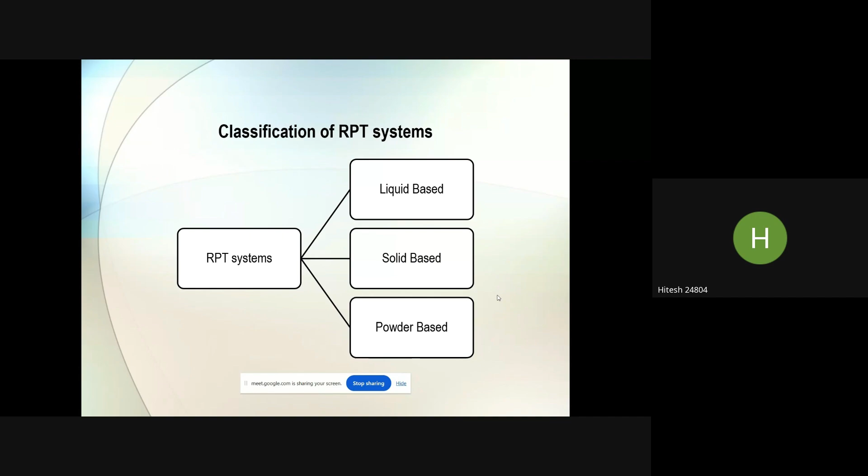Here are the RPT systems, rapid prototyping systems. There are three basics: liquid, solid, and powder based. In liquid based rapid prototyping, these are some manufacturers currently working with equipment related to liquid based rapid prototyping, and that equipment is nothing but a 3D printer. 3D Systems is dealing with stereolithography. Then Denken is one of the famous service providers in this area, and also Aaroflex. These are some manufacturers related to liquid-based rapid prototyping 3D printers.

Similarly, in solid-based rapid prototyping systems, the fundamental principles are laminated object manufacturing and fused deposition modeling. These are very common fundamental principles working behind 3D printing in case of solid-based systems. Again, some manufacturers dealing with this have been mentioned here.

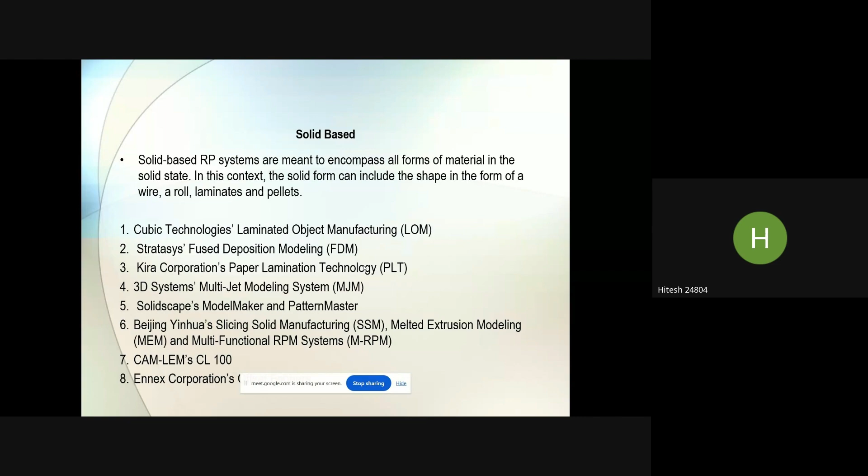Then moving to the powder based system, because selective laser sintering is very famous in this category. Z Corporation is there, providing three-dimensional printing. Z Corporation is one of the famous manufacturers.

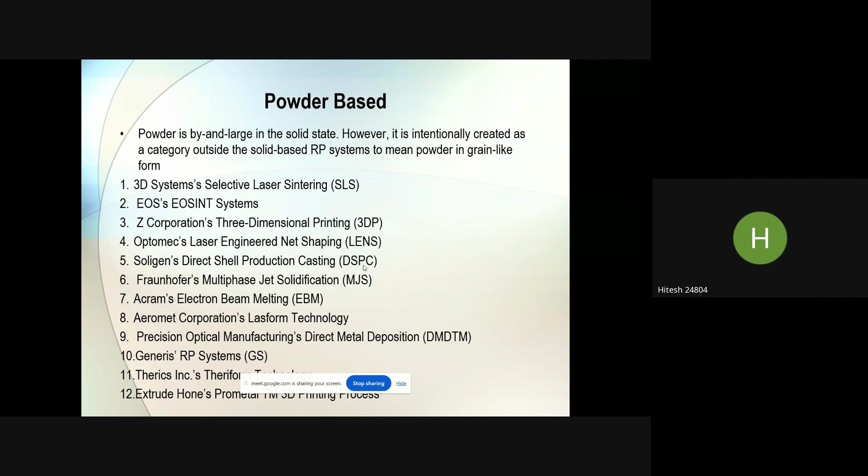Here we are adding material. In case of conventional machining processes, we have to remove the material - that comes under the category of subtractive manufacturing. Additive manufacturing, obviously, is where we are adding some material. The third one is the formative process, where we are changing the shape of the material by putting some stress into it, like bending stress is one example. So we are producing or manufacturing various composites, metals, and alloys by means of bending. Bending machine is an example. There are n number of components used in the automobile sector produced using bending machines. These are conventionally available materials where we are just changing the shape of the material.

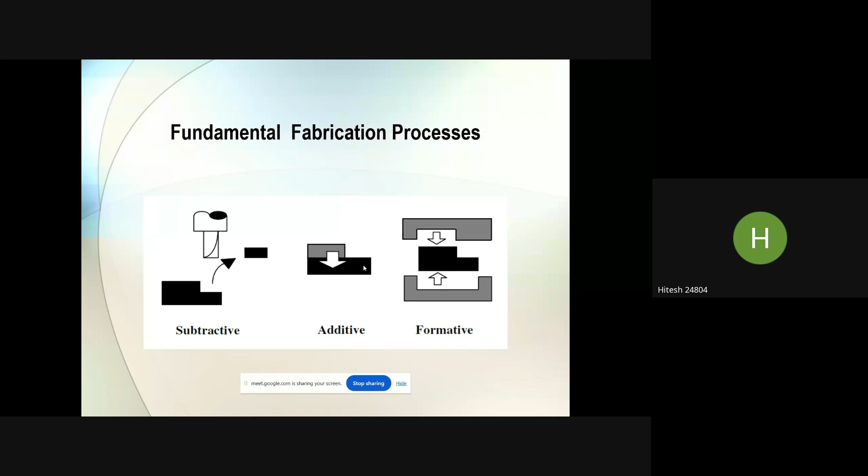Then there is a process chain in case of 3D modeling. These are the steps.

We have to 3D model a product which we want to manufacture using a 3D printer. Then data conversion is there. We have to check and prepare that, and once we are done with fabrication, we have to perform post processing. These fundamentals I already discussed in the first session, and in between there were many other sessions where these were discussed.

Now, data transmission via these two formats are most likely considered: STL and IGES. These are the two famous formats which are required in case of 3D printer.

So in the process chain, first of all, you have to prepare a 3D model using dedicated software. Then you have to transfer that data into the computer linked to the 3D printer. Then in the 3D printer, once printing is done, you have to perform post processing. That is the fifth and last step of the process chain when dealing with additive manufacturing or 3D printing. Then STL is the first process.

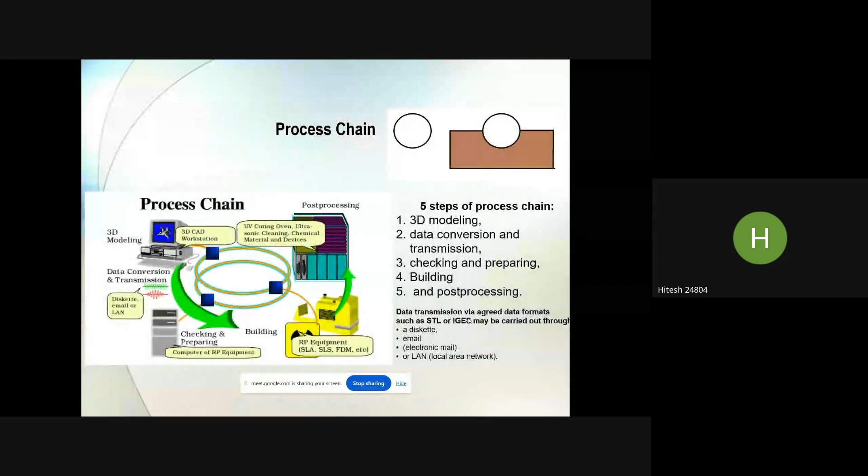As I discussed, there are three: liquid based, solid based, and powder based systems. So stereolithography comes under the liquid based rapid prototyping.

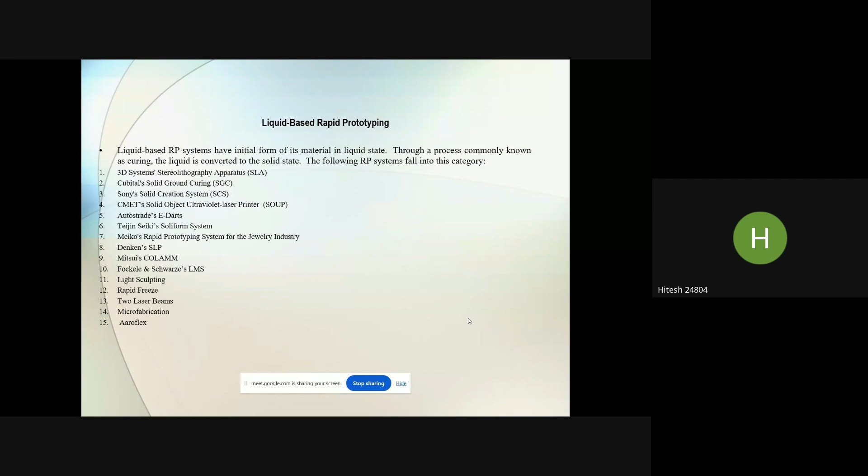That is the first example which I have quoted here: 3D Systems stereolithography apparatus, SLA. So what we are actually doing in this process is, for the part which we want to build, there is some fundamental principle which is working behind that.

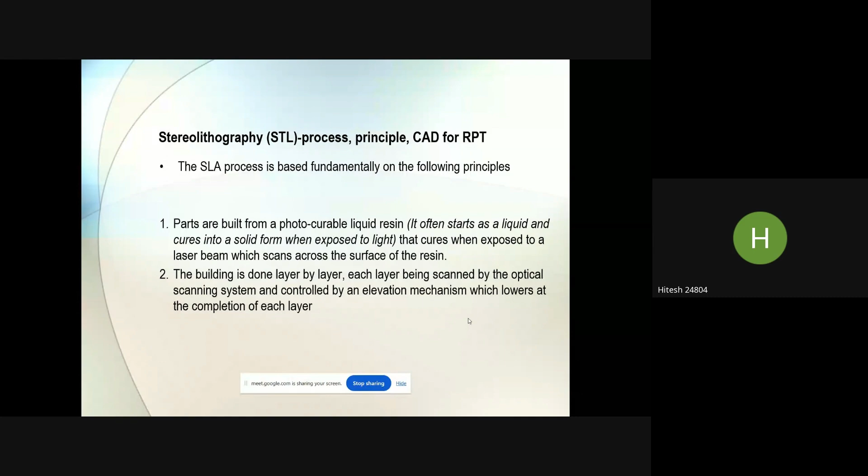In case of 3D printing, the formation is obviously layer by layer, so we have to look into the layers for completion of the process. Each layer is scanned by the optical scanning system in this particular process, and controlled by the elevation mechanism, which lowers at the completion of each layer.

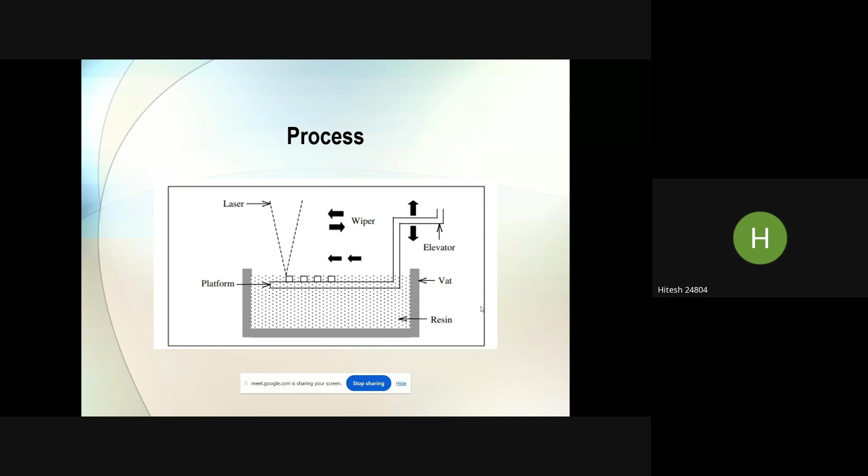This is the schematic of stereolithography, where you can see a laser coming and falling on the material, and the elevator is dipped into the resin. Since it's a liquid based rapid prototyping system, whatever thickness is required, accordingly we can program this particular process. So here is a video, with the help of which you will be able to understand this fundamental process.

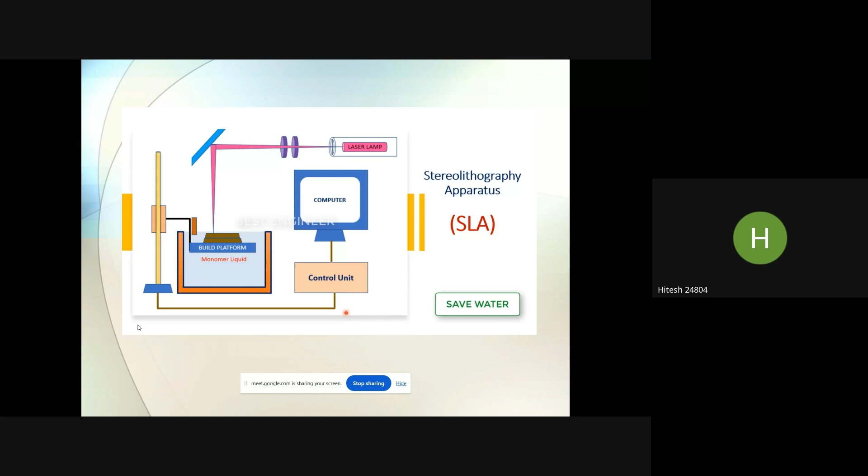Hello friends, in this video let us learn about stereolithography apparatus, that is SLA technology. This SLA technology is also called photo solidification, optical fabrication, and resin printing. This SLA technology also fabricates the object layer over layer. In 1992, 3D Systems developed this SLA technology.

SLA works under a photochemical process, where the raw material is in the form of liquid, a monomer and oligomer combination liquid. When UV rays fall on that liquid, it gets polymerized. This is the only process which makes that transparent object, that is SLA.

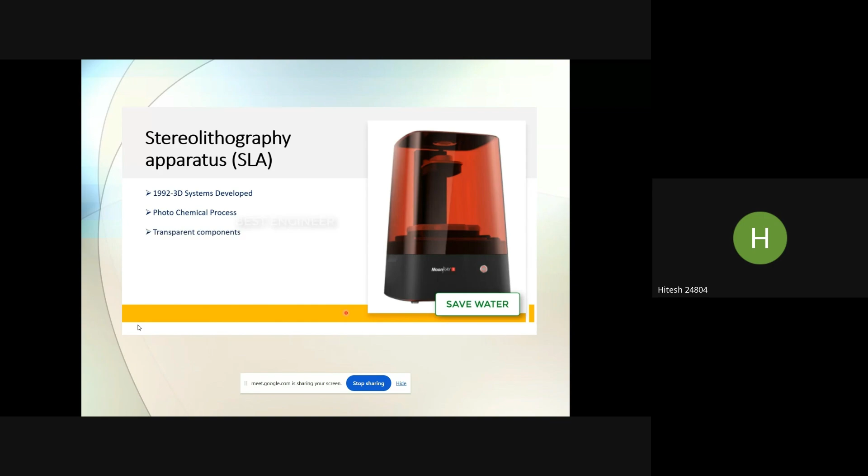Investment casting patterns can also be made using this SLA technology, up to 20 micron accuracy. These are the reasons we need to focus on SLA technology.

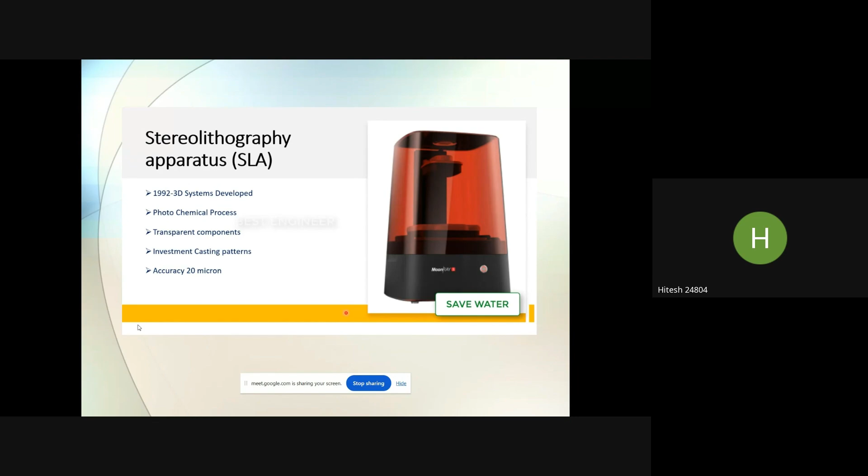Now let us see the list of components used in SLA technology. Resin tank - this is the main component for SLA technology. This resin tank is completely filled with the combination of monomer and oligomer.

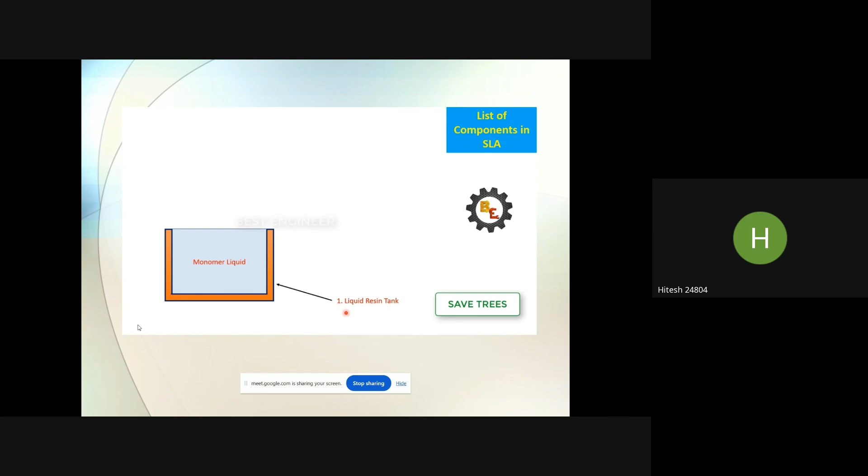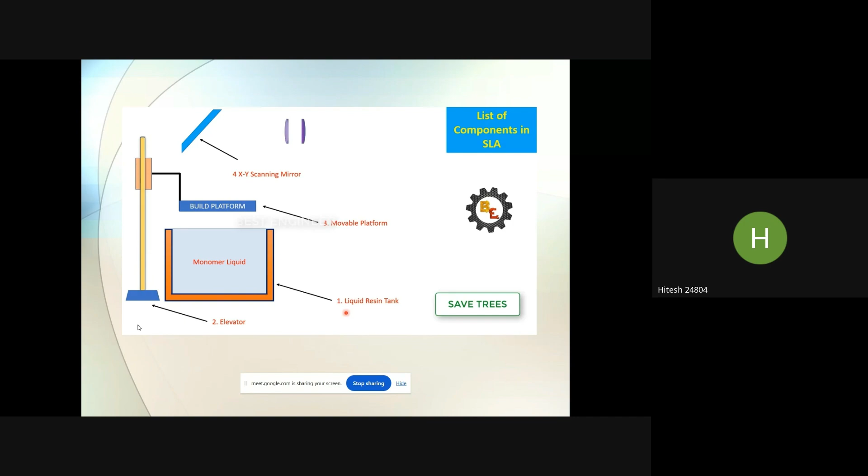Elevator - this elevator is used to guide the movable platform in the Z-axis direction. XY scanning mirror - this focuses the UV rays on the liquid. Beam focusing optics, laser source, computer hardware, and sweeper - these are the major components.

Normally, the tank will be completely filled. This sweeper is used to wipe the liquid over the build platform to make it uniform, and this build platform moves in the Z-axis direction with the help of this elevator. This XY scanning mirror focuses the UV rays on the liquid.

Laser source - here the UV rays will be generated, and these UV rays are focused by the beam focusing optics, and it falls on the XY scanning mirror. Based on this XY scanning mirror angle, the light rays focus on the liquid. These are the functions of these components.

First step, we need to design the component using computer software, and it should be sliced into horizontal layers, and the digital code will be generated. This digital code will be given to the SLA printer.

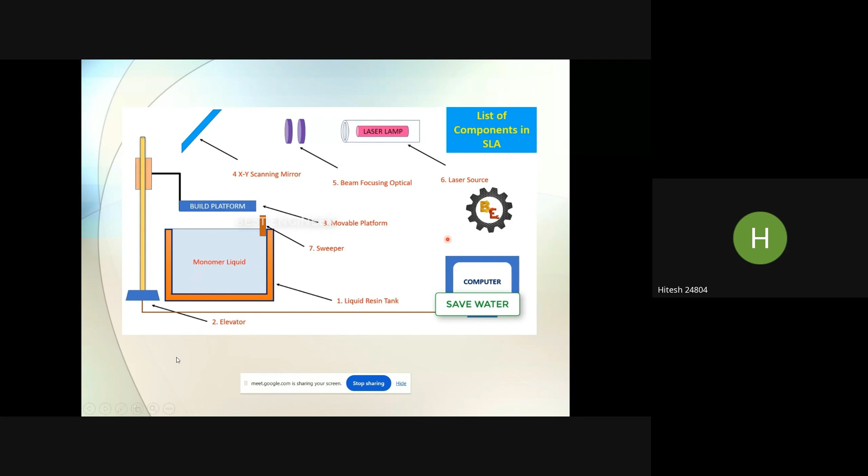First, the bed will be in initial position at the top. After giving the input, it will move step by step down into the liquid, and it will stay below the liquid level. That height depends upon the input layer thickness. Suppose we are giving 0.1 millimeter thickness, this bed will stay below the 0.1 millimeter thickness.

This sweeper spreads the liquid over the platform. After giving the input, UV radiation is focused on the photopolymer resin with the help of CAD software in the desired shape. Our object is built over the platform.

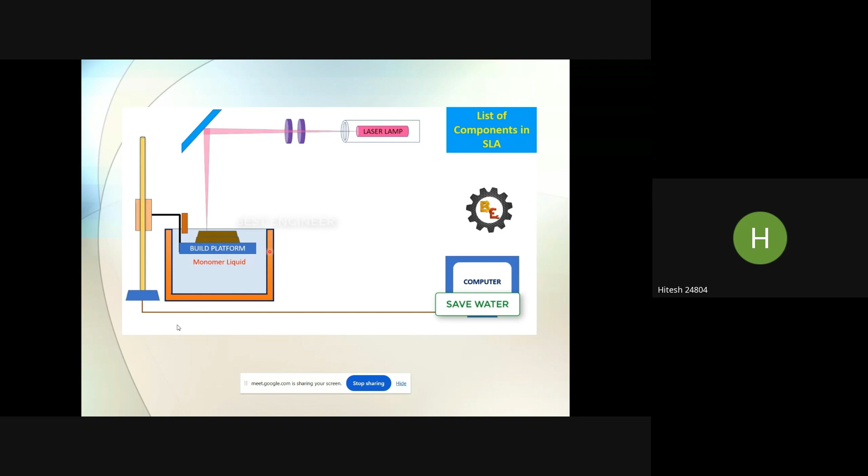After completing the successful first layer, the build platform moves one step down. That height is our layer thickness. Again, the UV rays focus on the liquid in the desired shape, and the next layer will be formed.

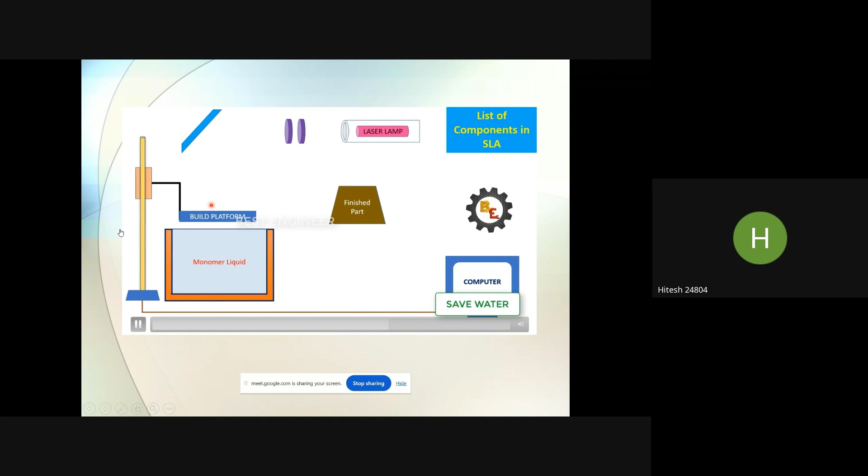This process repeats until the object completes. After completion, the bed moves up and stays there to drain out the remaining liquid. Then the object is removed from the build platform, taken away from the platform. These are the steps to fabricate a component using this SLA technology.

So this is how the thickness of an object is obtained in this particular process, that is stereolithography. And obviously we have to perform some post-processing techniques over this part which we fabricate using this process. And the other thing is how we are actually converting the resin into a solid part. So that is the most important factor here.

So here they are using UV rays for the same purpose. This is how they are changing one form, that is liquid, which is the raw material, into the solid form. That is why it is called the photoresin technique. So here is another one.

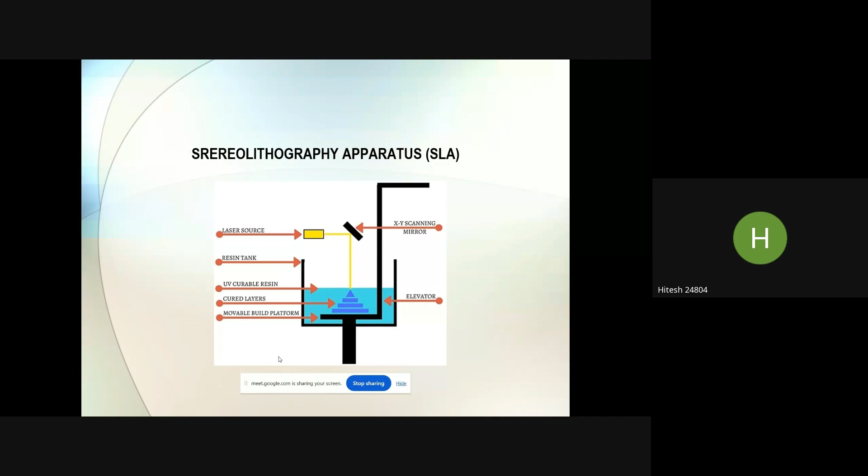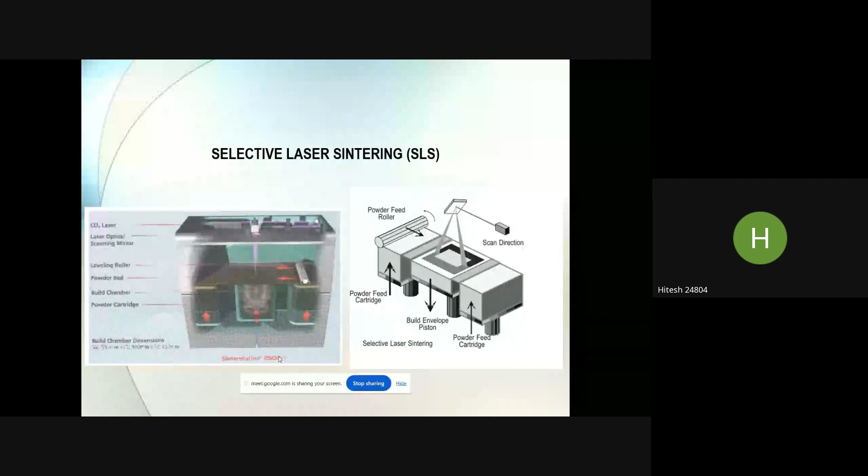So similarly, we have this technique where we use powder as the raw material. In the previous case, we were using liquid as the raw material. So here in selective laser sintering, we are using powder form in the initial stage, and obviously we have to convert that powder into solid form. So I will not be discussing this part. These are some basics.

Similarly, we have the third one, that is solid rapid prototyping systems. Under these systems, I have quoted one example of laminated object manufacturing. So lamination, you all know what lamination is. Here for lamination, a sheet is used, so that sheet is a solid material. Obviously the same or similar material has to be used if we want to fabricate a part or any component using this process.

So that will act as a stack of those laminated layers. You have to fabricate a part layer by layer, and the raw material we are using here is in the form of solid itself. So this is the example of the third system.

Now coming to the additive manufacturing process from the research point of view. On this side I have shown some traditional additive manufacturing processes like rapid prototyping manufacturing, rapid biomodel manufacturing, direct metal manufacturing, rapid mold manufacturing. These are some traditional additive manufacturing processes.

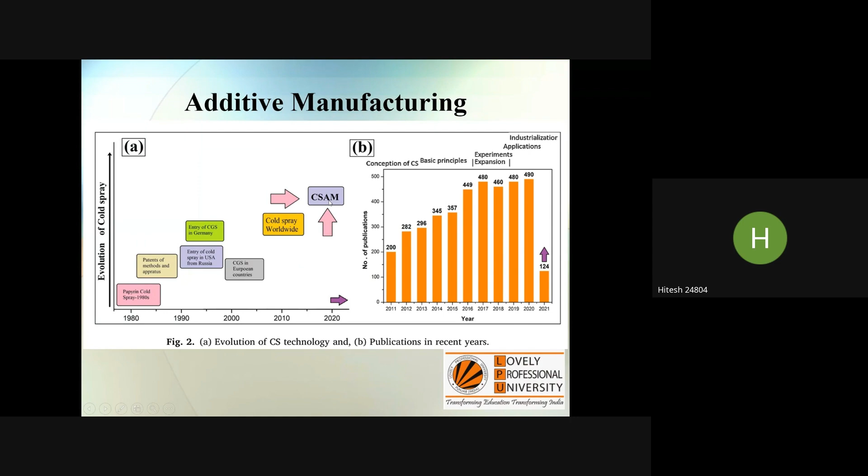As I said in the previous session, the degree of freedom required using conventional processing techniques is very high if you want to manufacture such complex shapes. But with the help of cold spray additive manufacturing, and additive manufacturing techniques in general, these can be produced in a very short time.

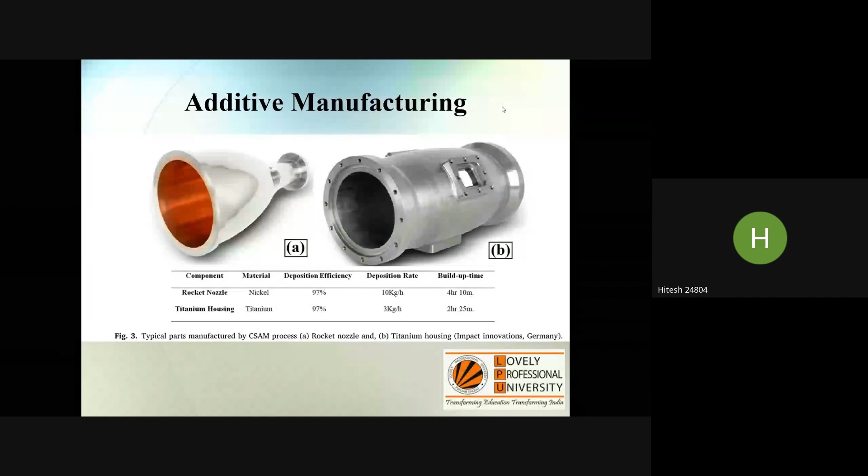Further, in additive manufacturing we use liquid, solid, and powders. Since I am talking about cold spray additive manufacturing, which is directly linked with thermal spray, here we use powders as the feedstock material.

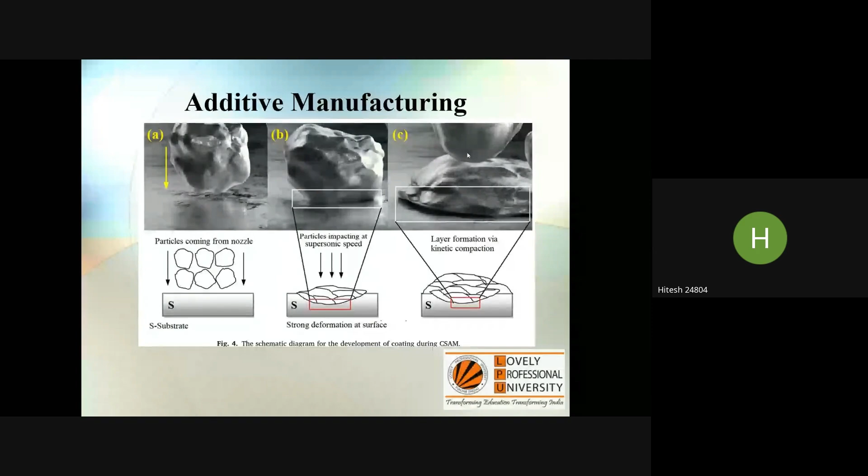Because we are particularly dealing with powders, we have to use powders for the fabrication of parts. The powders used for fabrication can be produced by three methods - we are now concerned about the raw material we are using. First is the atomization method, second is spray drying, third is fusion and crushing.

There are two techniques used for the fabrication of powders: first is the top-to-bottom technique, second is the bottom-to-top technique. Let's say you have a piece of metal and want to convert it into powder - that's one method. Otherwise, you can crush that particular material. So these are the two techniques, and for production of powder you can follow these three methods - atomization method, spray drying, and fusion and crushing - because this is one of the key parameters while selecting the material.

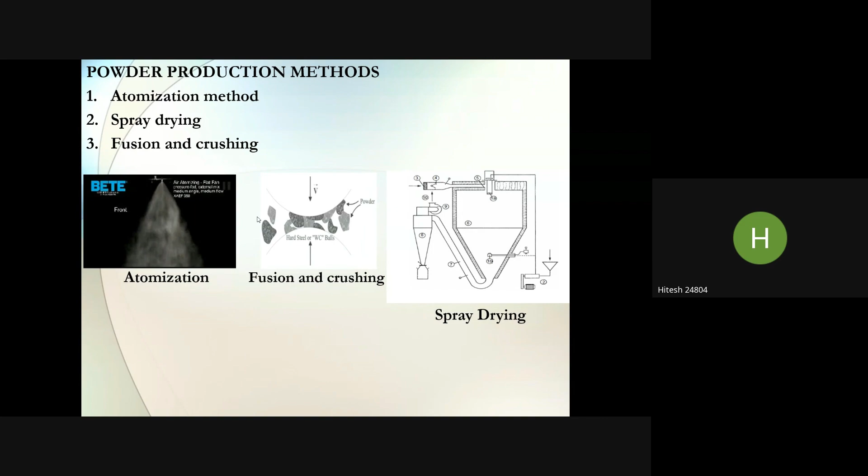Because it is particularly mentioned, if you are using a powder, which method has been used for the production of this powder is already mentioned on the catalog for the parts which you want to manufacture. Let us say for aerospace engineering you want to manufacture a part. In some cases you want spherical shape, in some cases irregular shape, and in some cases a mix of these two shapes. So that depends, like here you can see.

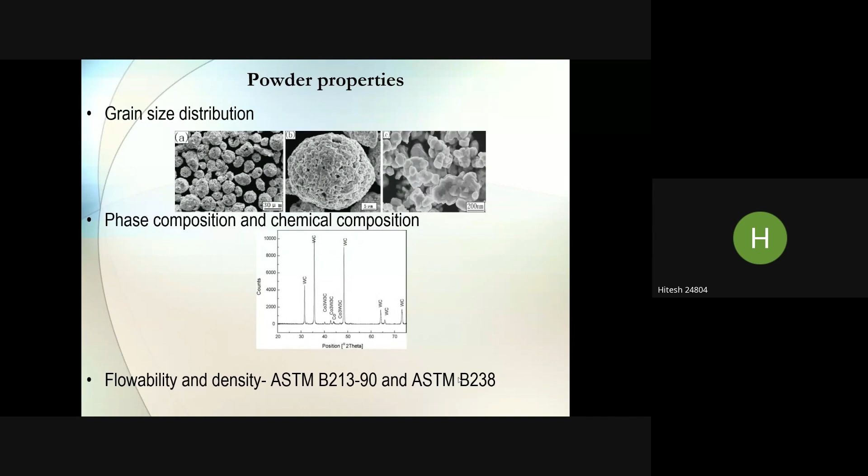So before using the material, you have to characterize it, and some standards are there if you want to test your material for flowability and density. These are the standard codes which you have to follow, and accordingly you can test the flowability and density of the powders. Here I want to code powders only.

Here you can see in the fundamentals, because we have integrated thermal spray with the additive manufacturing technique, what is the fundamental working behind thermal spraying? Thermal means heat, spraying means you know what is spray. Whenever we use spray, that is in the form of mist or some other form.

In that spray, this is a flame coming out of the nozzle, and in this flame you can see some particles. These are nothing but the powder particles, which are heated with the help of this flame and finally get deposited on the surface of the component where you want to coat this particular material. Here is the substrate material on which you want to coat your material. The powder particles, in orange color, are coming and striking on the surface, then getting deformed, then another particle comes and gets deformed, another particle comes, and in this way layers are formed.

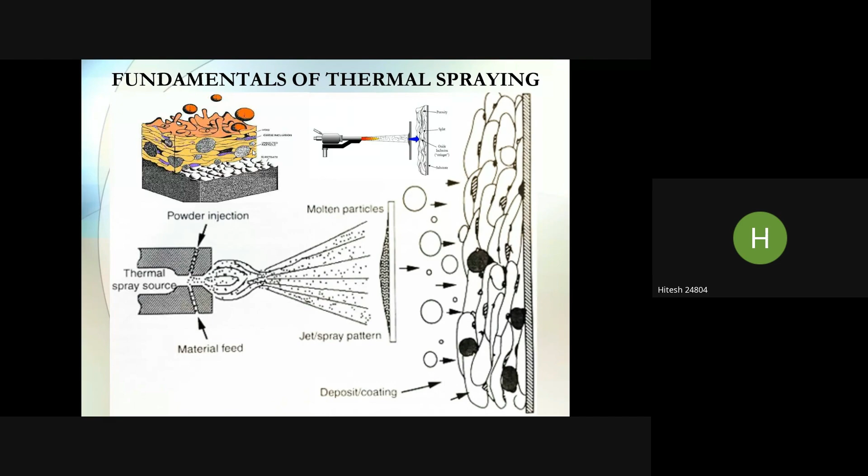Similarly, in case of CSAM, that is cold spray additive manufacturing, you can fabricate a part using this fundamental technique, but the additional part is the programming. You have to program that particular apparatus, and the nozzle will run accordingly to fabricate a part or component. There are other methods also: plasma spray, FS which stands for flame spray, wire flame spray, arc spraying, HVOF spraying, detonation gun.

So there are different classes of material, and further when we club those classes together, we'll get composites, because this session is all about the composites. So when we combine two classes of material, then we'll get composites.

When we add ceramics into the metals, we get composite materials. Depending upon the melting point of the material, in metal and alloys the melting point is around 1500 degrees Celsius, while in ceramics it can go beyond 2000 degrees Celsius. We have refractory materials like aluminum oxide, silicon carbide, and tungsten carbide - basically carbides, oxides, and nitrides - where the melting point can go beyond 2000 degrees Celsius.

Depending upon the melting point of the material, you select the process you want to integrate with additive manufacturing, or use for deposition of coatings. That is why different flames have been designed for different materials.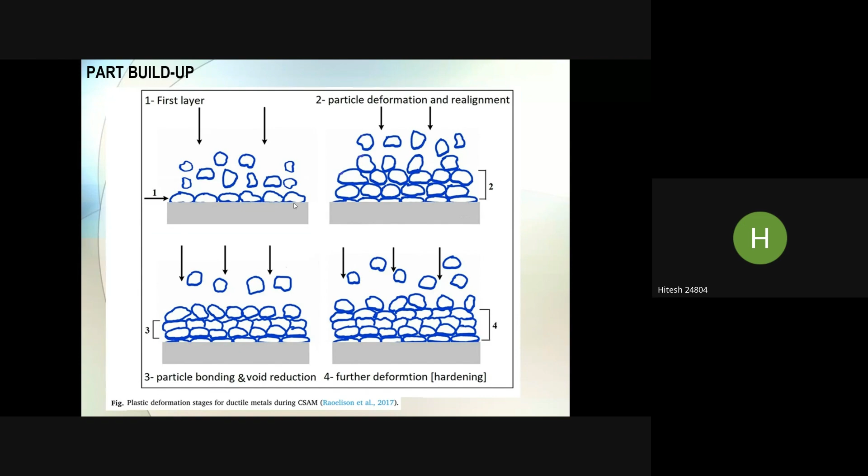Because heat is also involved in this case, it is already heated, and another particle with very high velocity comes and strikes the first layer. That is why complete deformation can be seen in the second, third, and fourth layers. Further deformation happens due to continuous striking of particles over each other, which is called hardening. This is the part buildup mechanism of cold spray additive manufacturing, applicable for ductile materials, because fabrication of a composite material is very complex. We'll discuss that also.

Now coming to the conventional coating technique, because we are integrating that technique with additive manufacturing. This is the surface obtained after the deposition of a material on some surface.

Here, some unmelted particles can be seen on the surface. But if we increase the process temperature, like here, you can see the process is HVOF, used to deposit materials with a medium range temperature. That is why these particles remained unmelted.

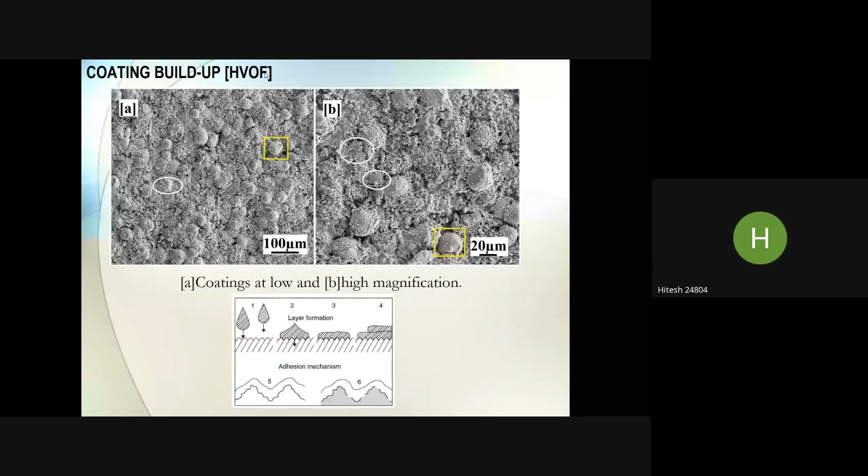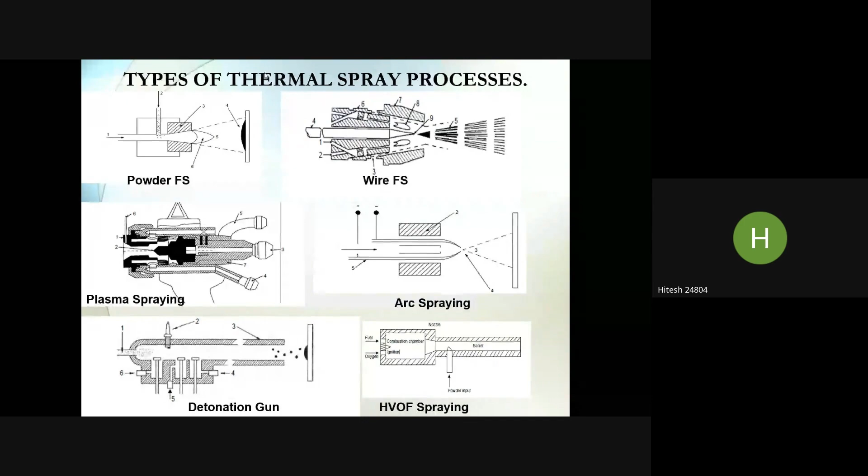But in this process, you can see it's plasma spray, as mentioned in the previous slide. Plasma spray technique is used for depositing materials with high melting point. So on this surface there are very few unmelted particles because we have increased the temperature range. If the melting point is high, we have to increase the temperature accordingly so that we get fewer deficiencies on the surface or in the material.

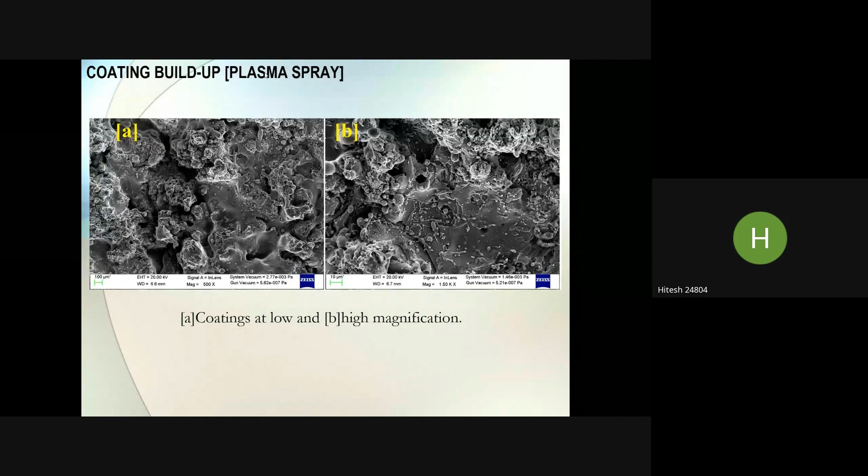Now, if we compare cold spray additive manufacturing with other techniques, there are other techniques used, like thermal spray, which is used to produce layers. And if you want more thickness, you can go with the cladding process, where a thick layer can be produced.

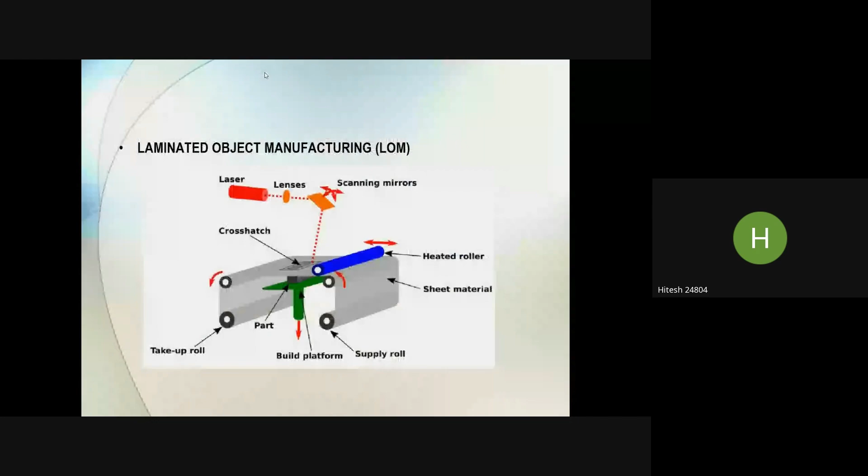But you can utilize these two processes, coating and cladding, with additive manufacturing to fabricate a part. Here I am not talking about thickness, I am talking about the fabrication of the part, as mentioned in this slide. These are the processes which can be integrated with additive manufacturing for fabrication of parts.

Like the first one, thermal spray, used to produce a layer, a coating. Second, PVD and CVD — top to bottom approach, bottom to top approach. Here we have coupons of material, and through atomization we convert those coupons into atoms, which get deposited on some surface to form a thin layer, in nanometers.

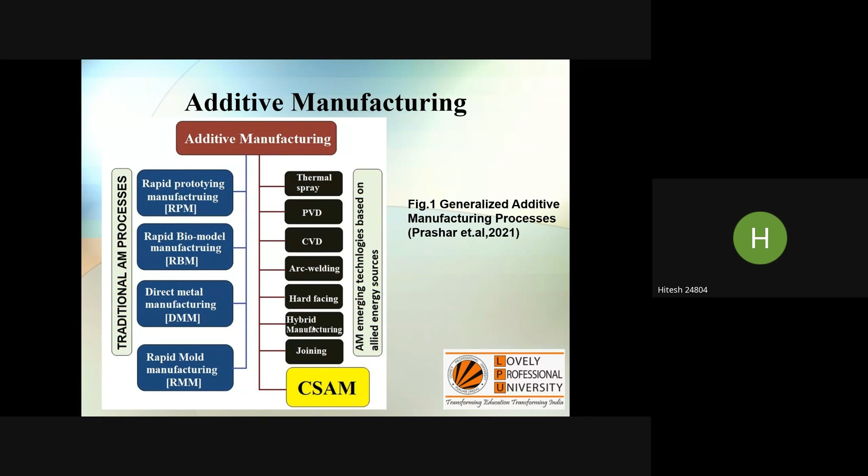Then arc welding, you know arc welding very well, used for hard facing, which is used for cladding purposes. Cladding means a thick layer. Likewise, hybrid manufacturing is where n number of processes come together to fabricate a part. Joining is obviously wherever you are joining two parts together.

So coming back, if we compare these two processes with other techniques, here the deposition rate is very high. Because we are using powder as material, which we put into the powder feeder, and through the nozzles, the velocity of the powder particles is in the supersonic range. With this very high velocity, we can get metals into action, because it is difficult to reshape metal due to its ductility, since the temperature is very low in cold spraying.

That is why it is called cold spray — the temperature is very low. So we are not integrating plasma spray and HVOF processes with additive manufacturing, we are integrating cold spray. Cold spray doesn't mean the temperature is in minus degrees; it means the minimum temperature used in thermal spray technology, around 600 to 700 degrees Celsius, or 500 to 700 degrees Celsius. For example, if you want to deposit aluminium, its melting point is very low but its ductility is very high, so those types of materials can be deposited using this technique.

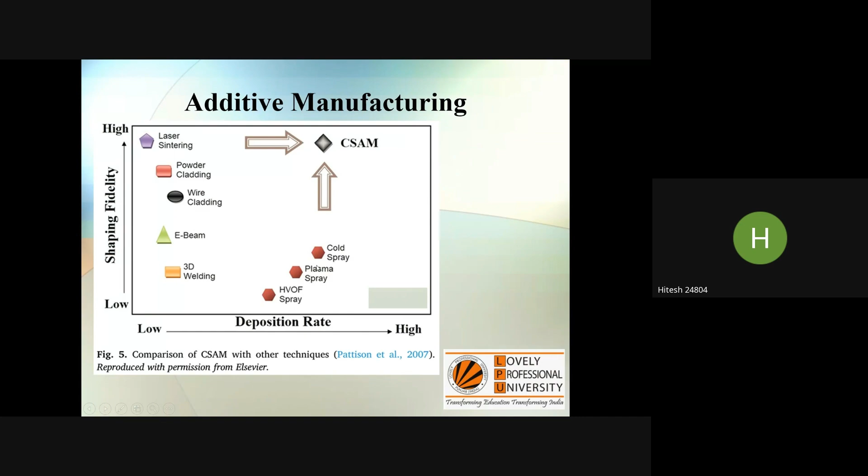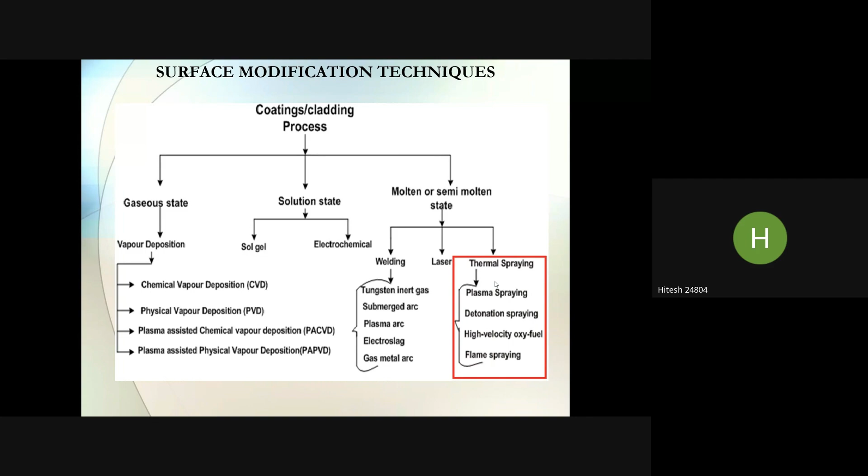Then coming to the third one is the molten or semi-molten state, where we use welding processes. Then laser technique is there, and the last one is thermal spray. But here these are used for coating and cladding purposes only. So the new technique which has been introduced to this category is cold spray, which we have already integrated with the additive manufacturing process.

And this is the difference, how these techniques are different from each other. And if you check the deposition rate, here is the deposition rate in kilogram per hour. So it is very high for these techniques, especially in case of thermal spray.

So why are we integrating additive manufacturing with thermal spray? This is the second last column, thermal spraying. You can see the deposition rate in kilogram per hour is very high, up to 10. Then coating thickness, look at this. So this coating thickness is in microns.

Otherwise, in case of wear and erosion, because surface engineering is more likely related with wear and corrosion applications. So in wear and corrosion applications, we use a layer of 200 to 300 microns only.

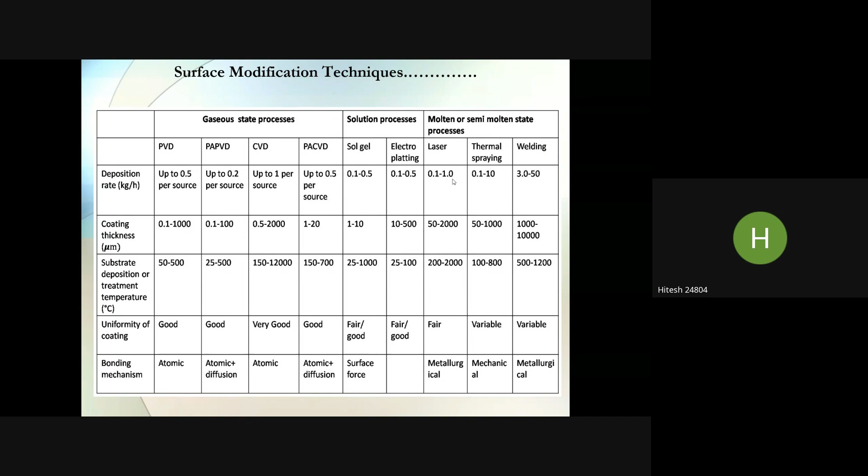But the thing is, why are we showing this particular slide? Because of its deposition rate. The material which we are feeding, that deposition rate is very high. Meaning if the deposition rate is high, the wastage is less. So this is the main parameter.

Then these are the materials which can be used, like for wear resistance applications, where there is direct contact of the materials with each other. So like tungsten carbide, cobalt, this is the material which is used for room temperature applications. Their extended versions are already there: tungsten carbide cobalt chromium.

Then you can further integrate this particular process with laser texturing. So you can perform laser texturing on the surface, and then you can use this particular material on the surface. Similarly, if you want to join two parts together by using some means of additive manufacturing, then even you can use some pre or post treatments on the surface of the two parts which you want to join.

Like laser texturing is one of them. Then micro drilling is one of them, where we produce grooves intentionally to release the stresses in the component or in the part of a machine or machine tool, right?

Similarly, the extended versions of materials are available, but these are well-known materials. Here we cannot alter the composition of the materials. So these are patented materials which can be used in the application. Like here, the second material which I mentioned, WCCO, tungsten carbide cobalt.

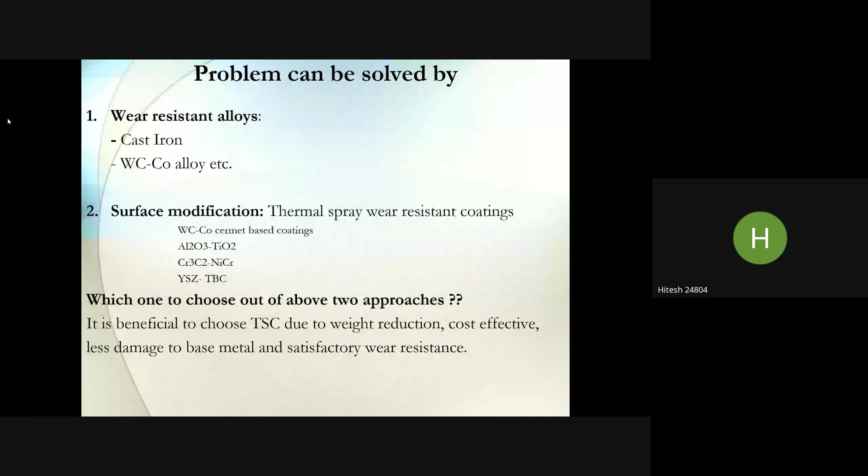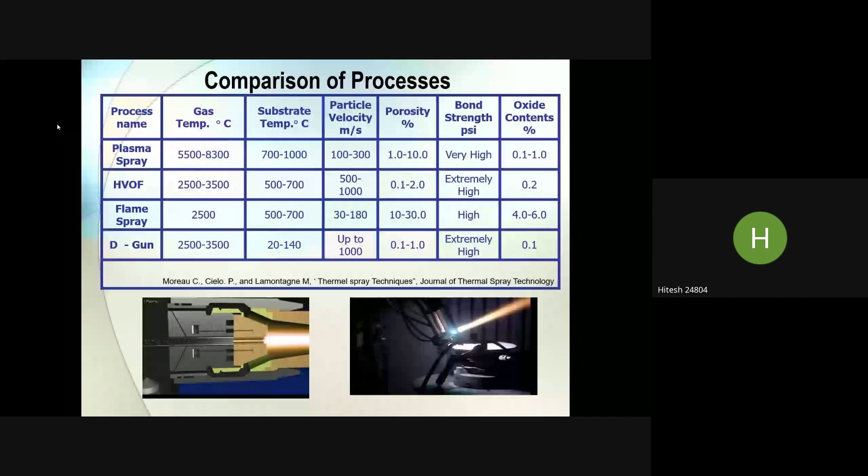Temperature is again a very important parameter, because if we keep increasing the temperature, we are compromising the materials also. If the temperature is excessive, then we may lose the actual properties of the material. If you are depositing layers using a material, that material is obviously a powder, so in that case there may be chances of material degradation due to high temperature, and you may lose the actual material's properties. That is why temperature control is required.

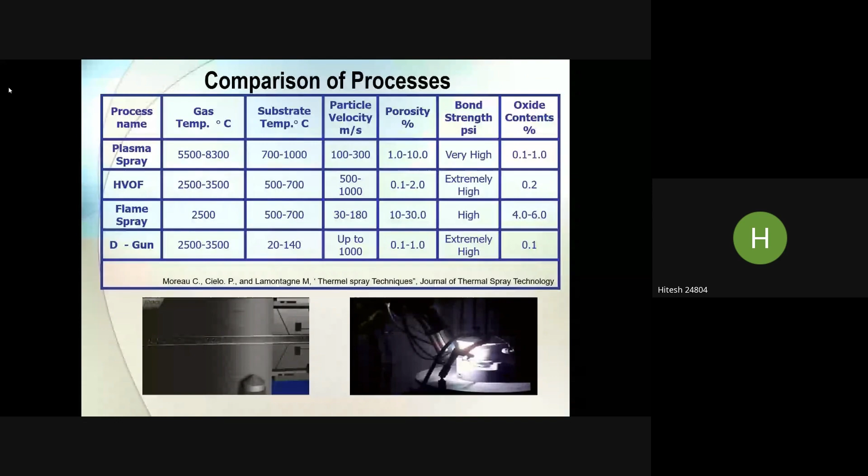But on the other side, deposition rate is also important. So here you can see the temperature, in this case plasma, HVOF, flame spray, and this one, the temperature is very high. As I said earlier, in cold spray it is around 600, 700, sometimes less than 500, you can conclude it is 400 to 700, between 400 degrees Celsius and 700 degrees Celsius. So the temperature is very low because we have to avoid material degradation also due to excessive temperature. That category has already been introduced in this particular case.

Then characterization techniques, some characterization techniques we can use. These are very common techniques, you all are familiar with metallurgical characterization, where we perform XRD, porosity, FESEM. When you are done with the fabrication of a component, you have to check its microstructure and the morphology of the material, so these techniques can be used. Then you have to perform mechanical characterization, like hardness, where we use Vickers hardness, then 3-point bending tests, fracture toughness analysis, and scratch test.

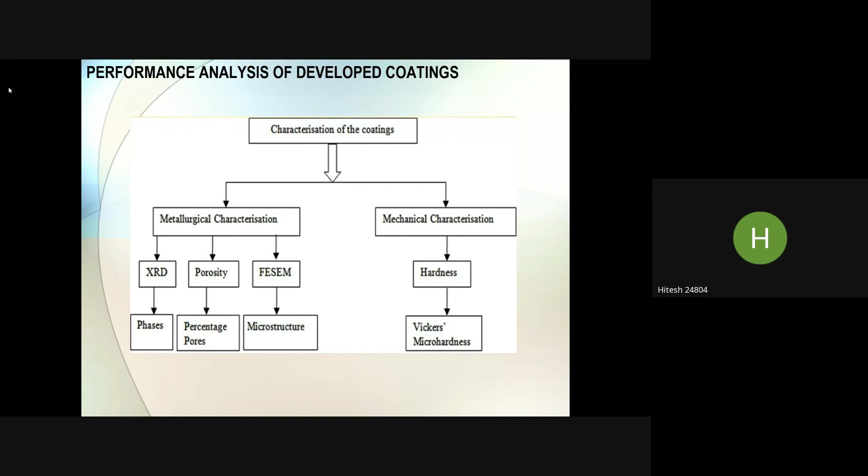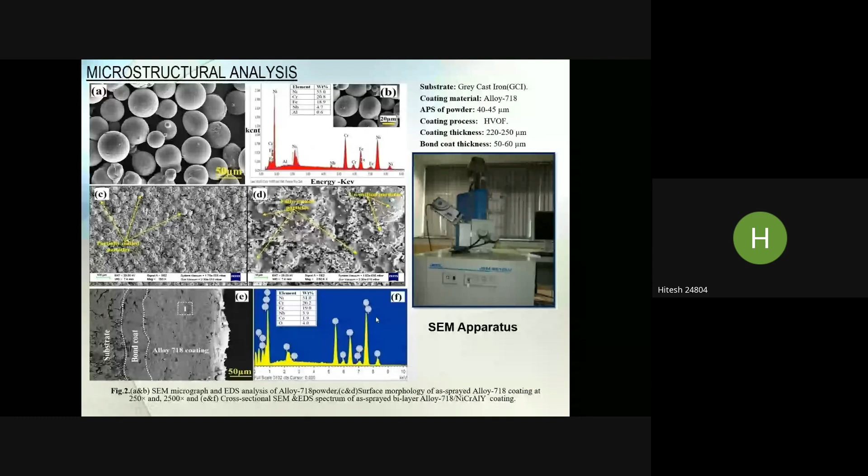So here is one attachment provided by Oxford Instruments. It is used for the calculation of composition, which is very famous with EDS, and this mapping can also be done to show how the elements used in a composite material or alloy are distributed over the surface.

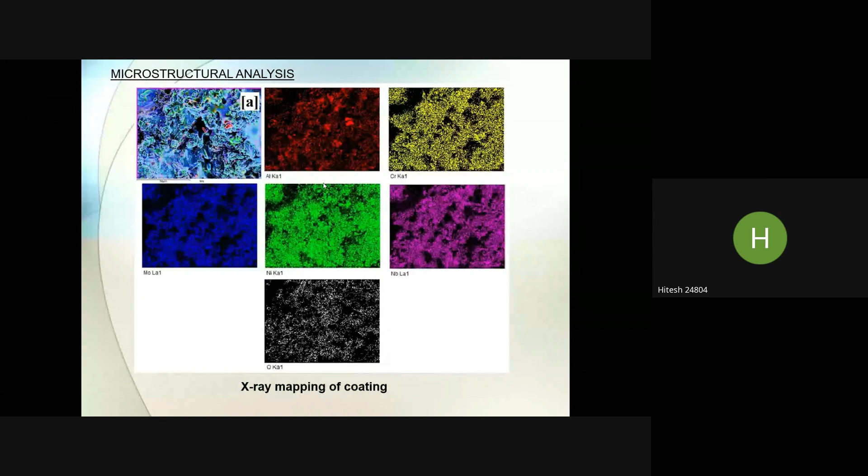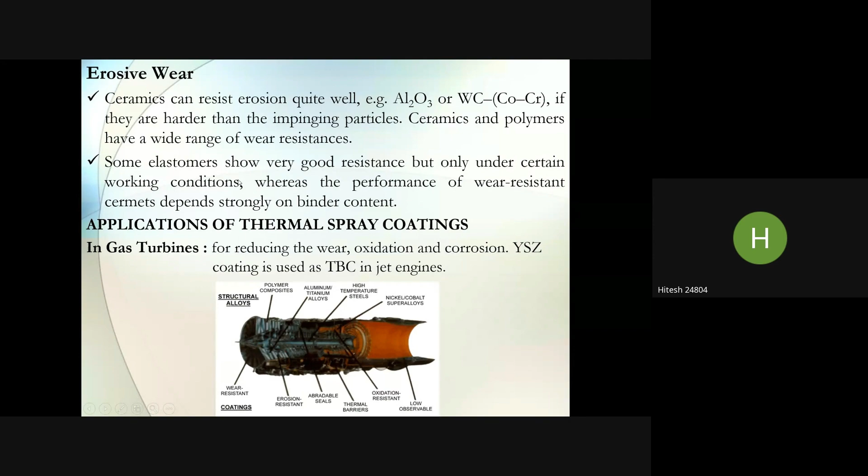Now talking about specific applications, here are some materials and how they are contributing to actual applications. Like in the case of gas turbines, which materials can be used here? Some materials have been mentioned which can provide oxidation resistance as well as erosion resistance. These particular materials can be used for these applications.

Additive manufacturing is widely used in the fabrication of biomedical implants. The material used there is calcium phosphate, very famous under the name hydroxyapatite, or HAP. You can use this material for fabrication using a 3D printer or cold spray additive manufacturing. We have one research article on this also.

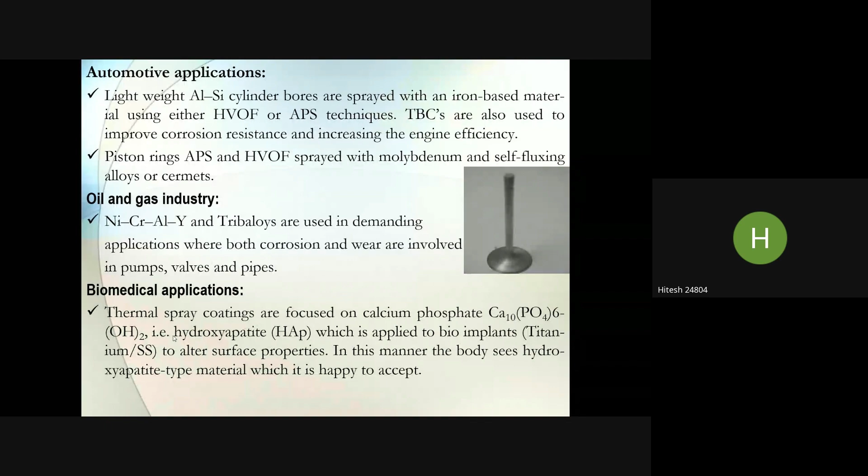Here are the materials, their operating temperatures, and their applications. You can see some pure ceramics, then alloys, composites, and super alloys. Like Inconel 718, Inconel 625, which come under the category of super alloys, used for oxidation and erosion resistance.

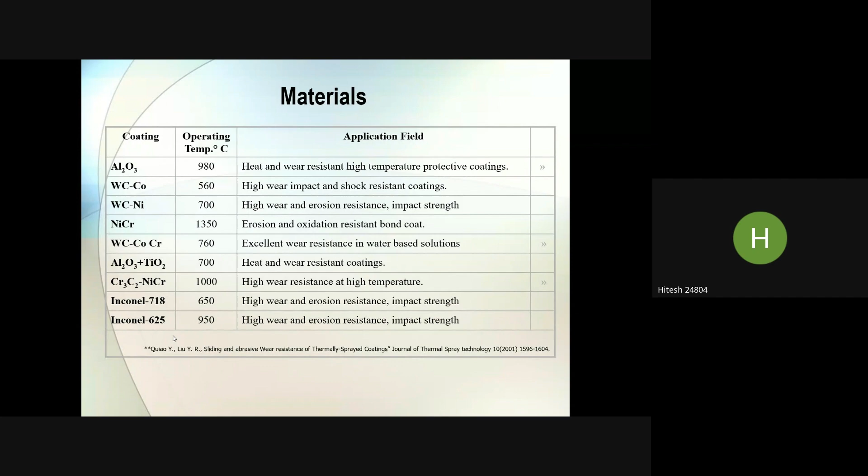Now coming to the advances in material technology, what industries are basically facing: wear and corrosion. These are the famous issues in every industry, because whenever any surface is exposed to some environment, there may be degradation, either due to chemical reaction or mechanical action. So these two terms are linked with chemical and mechanical action.

Wear related problems arise due to long working hours and severity of working conditions, so there is a need to develop new materials. Many of us are doctorates, so we have already done work on different materials during our masters and doctorate programs. We have developed different materials, conventional materials in some cases, nanomaterials in others. Sometimes we compare these two, sometimes we fabricate a combination, sometimes we integrate different classes of materials with different sizes, but the ultimate requirement is the research and invention of advanced materials.

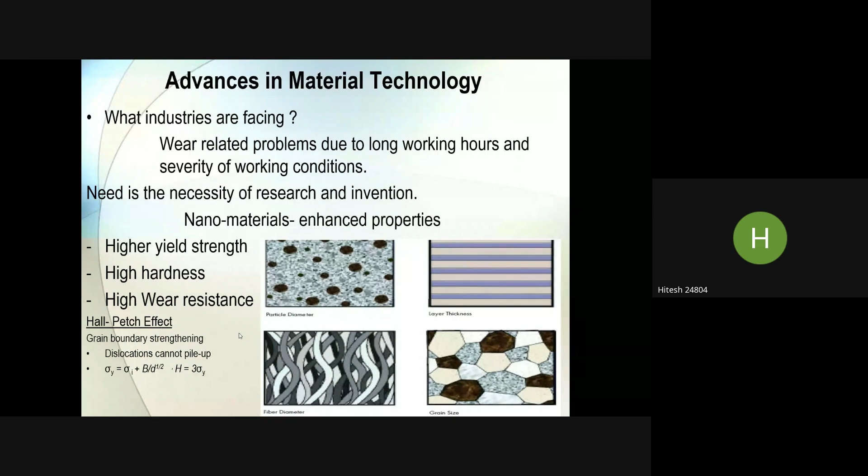Nanomaterials are one of them. The Hall-Petch relation is very important: when the grain size decreases, the strength increases. Yield strength increases, hardness increases, wear resistance increases, fracture toughness increases, and other required properties also improve. So these are some of the materials which can be used, like high entropy alloys, which are very famous, and bimodal materials, where you combine a form of conventional material and nanomaterial.

Then cold spray is one of the latest coating techniques, and finally cold spray additive manufacturing, where we combine cold spraying with the additive manufacturing process. We give a program linked with the cold spray setup, and according to that program, it starts building a product, part, or component which is to be manufactured.

So these are the famous journals you can refer to, where you can find publications related to these advanced materials and advanced techniques. Surface and coatings is one of them. You can find papers related to cold spray additive manufacturing in these three journals, which are very famous journals related to surface engineering.

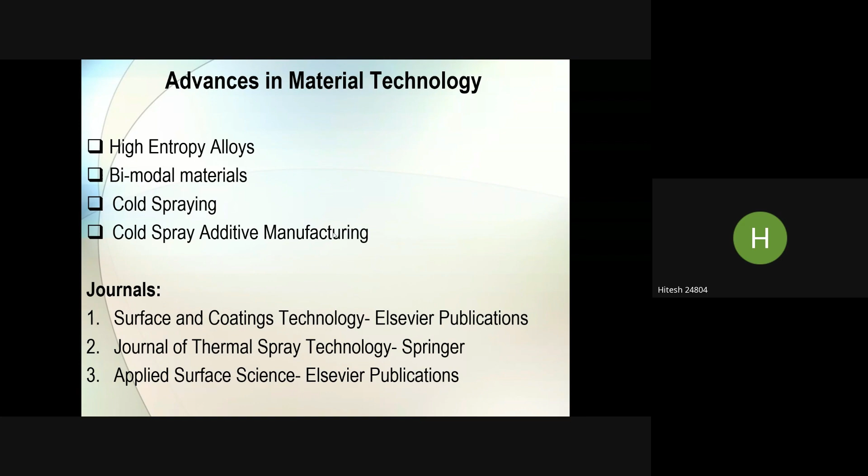Here are some studies which we have gone through, like this is the high temperature, because we are basically dealing with high temperature applications. So we use super alloys in this particular case.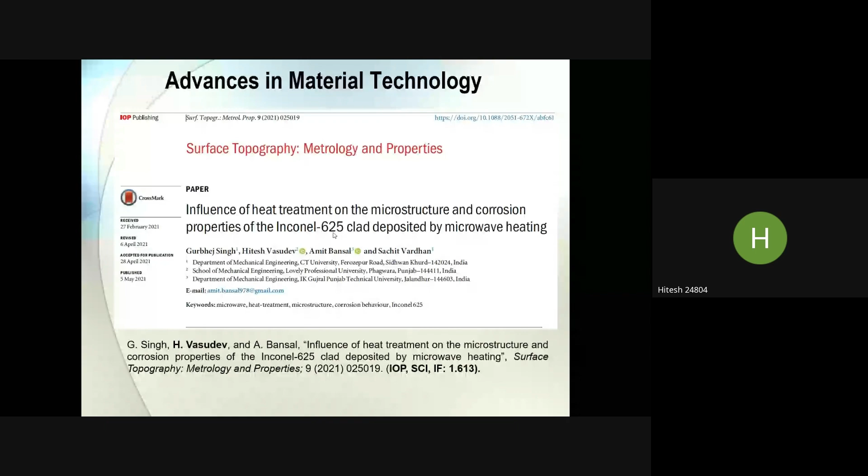So that is why we are concerned about these materials, and hopefully we'll be trying more about the fabrication of these particular parts, especially the parts manufactured using this surgical grade, that is SS254. This grade is basically used for the fabrication of many biomedical implants, and even for fixation devices.

Like if you have to fabricate a rib cage, then how that rib cage is fixed into your body, you need some fixation devices also. So those fixation devices are nothing but the screws. Small cages are there with clamps and screws. So we are more likely to work on these biomedical implants and fixation devices in the future.

So that is why we are studying the behavior of these materials, how they behave in different conditions, like if we use some other processes, post-processing, with these materials - what should be the behavior of the material at a particular temperature if we are post-processing that material. So that is also another aspect of this study.

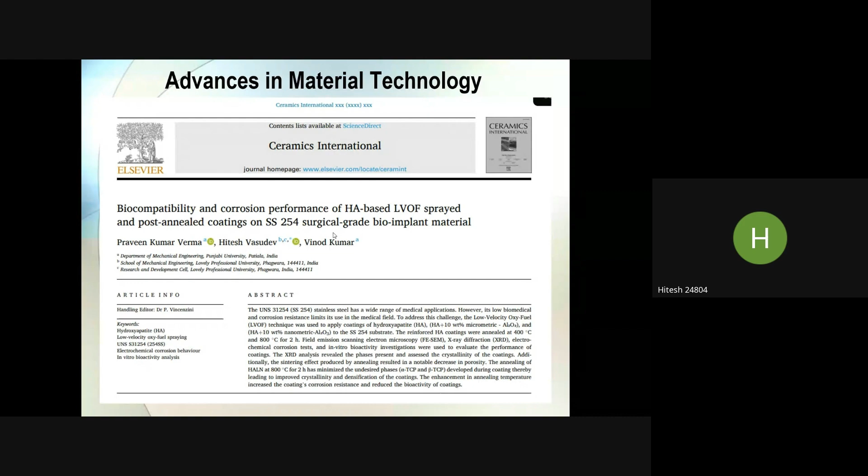But more likely, if you want to use any new material with a new process, then you have to initially perform some preliminary research on that material. So this is our preliminary research, and in the coming studies we'll try to integrate this particular part with the additive manufacturing part.

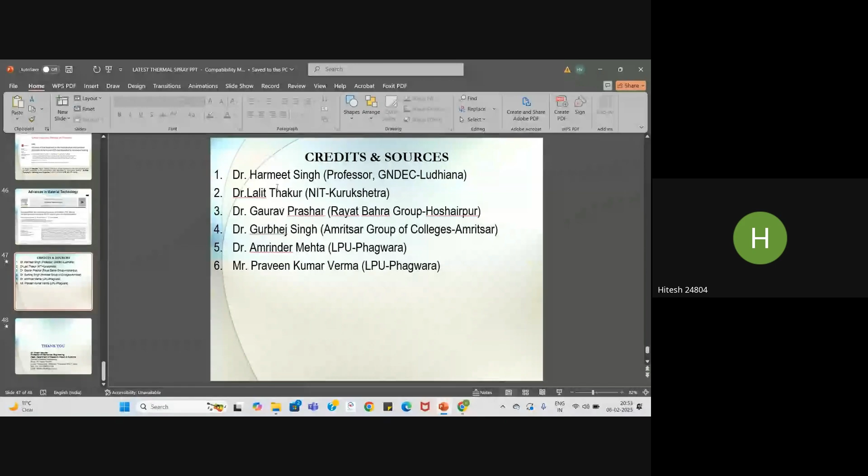Good evening, sir. Very informative and elaborative talk by you. Thanks a lot for all the key features which you have discussed about nanomaterial-based composites or bio implants. I would like to ask one simple question. Maybe it will be simple for you, but how could the toxicity and leaching behavior be addressed in the case of nanomaterial-based composites or the materials used for bio implants?

Hello, Dr. Hitesh, are you available? I think Dr. Hitesh is not available due to a technical error.